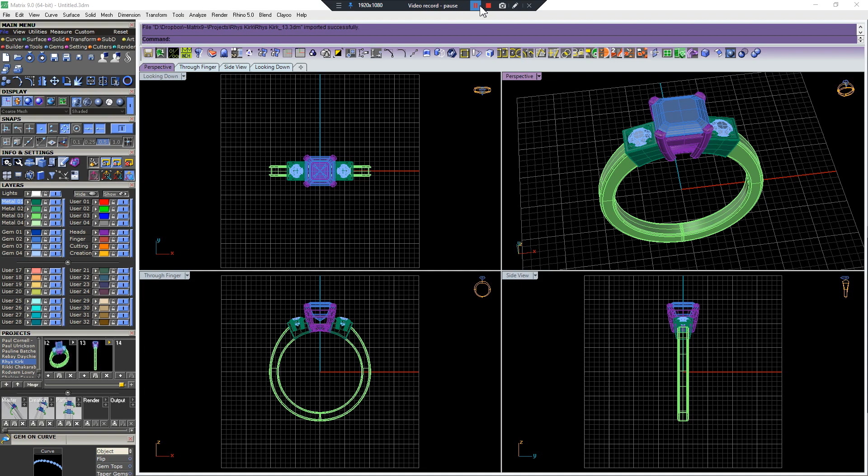Customer approved it. We ended up switching the center to an Asscher cut, which they wanted to take a look at. Totally cool. What I'm going to show you today is how I would prepare this to 3D print.

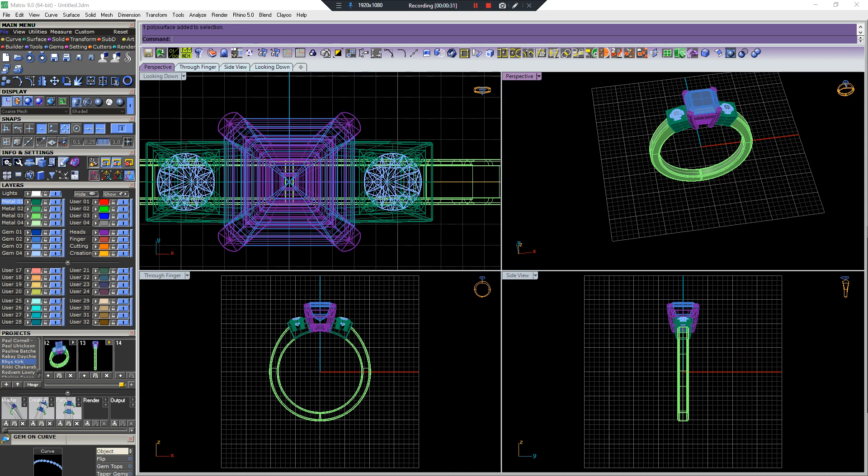I've got a Solidscape printer, so I'm very fortunate. I don't need to sweat the supports as much. Technically, I don't really need any supports, but I am going to put the casting support, the sprue base in, to save me some time.

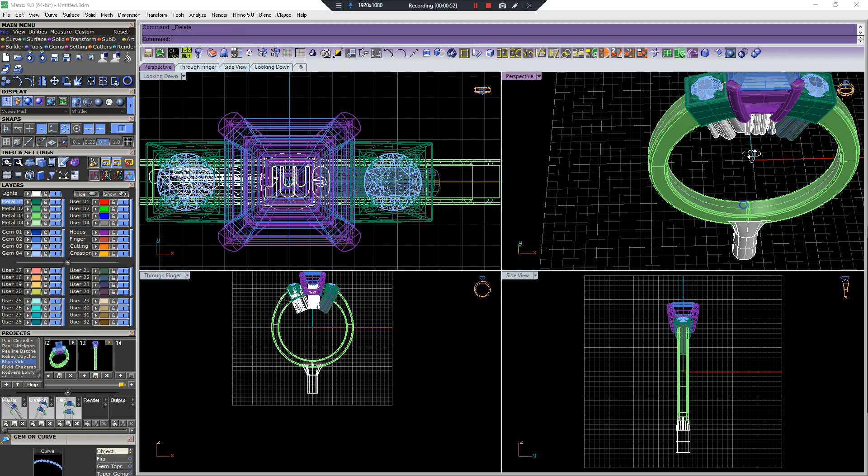First thing, dragged from off screen, I've got a file that has all my stamps kind of pre-made and ready to go. I can come in here and import it, then deselect what I want to use and delete the rest. It's got a nice tapered sprue base here.

And then it's got karats, the karat of gold, and my trade stamp that I use all the time, in this funny kind of elongated thing. Here is how I use this.

First thing I like to do is go into the job bag, get my eyeballs on where I wrote the finger size. Don't trust my original finger size, even though it's probably right. Just don't trust it. Double check yourself at this point in time.

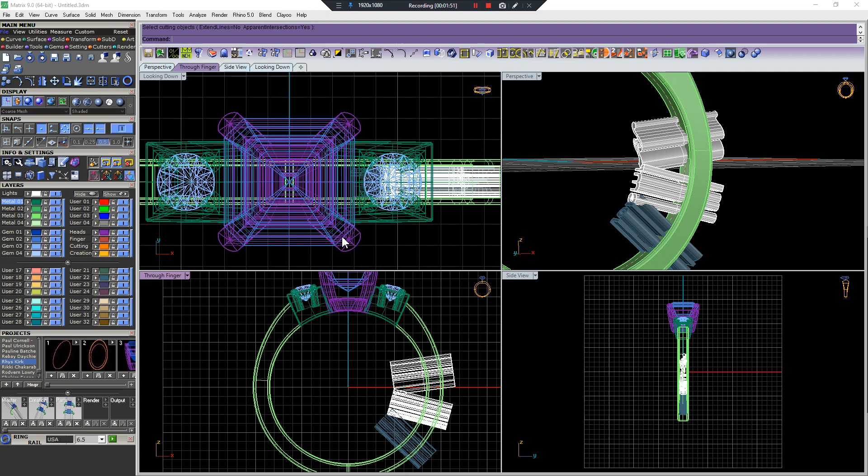This stage where you're prepping it to grow, in my opinion, is kind of the most important part. This is where you really slow down, take your time, double check everything. Because if you make the settings too small, if you screw something up, basically this is going to be your piece. Be friends with your setter.

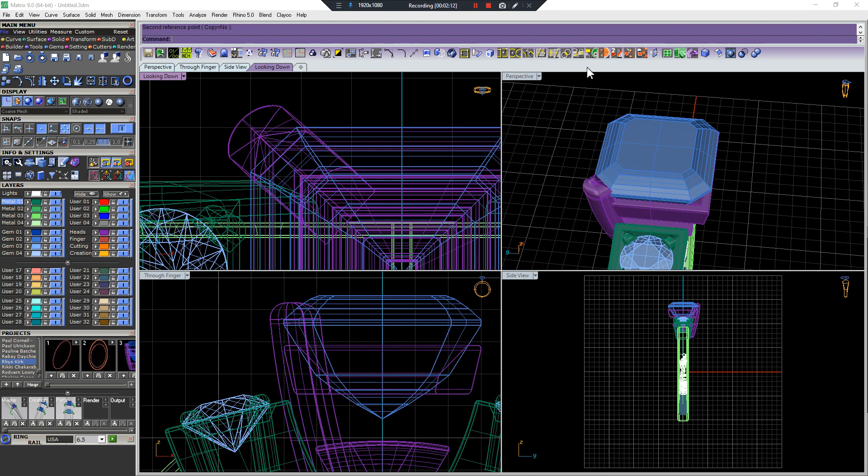You want your stone setter to like you, and don't make their life difficult. Communication with your stone setter is a huge factor if you're going to be successful or not. You're working as a team.

Follow their instructions. So everything I'm doing here is dictated by how far I sink it into the claw, how tall I make the claw over the stone, how I cut the seat, all of that.

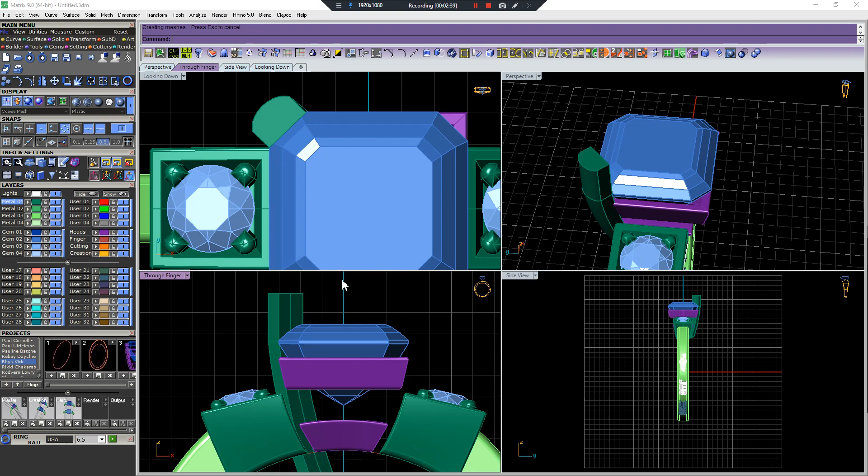That's all been slowly, over time, experimenting, playing around, and getting input from my stone setter, who happens to be my sister-in-law, and she is an incredible stone setter. She's an incredible goldsmith, she's just awesome. We've really tweaked our systems, and what you're seeing here is part of that.

Here's another thing. I know I rendered it to the customer in a certain way, certain proportion. Don't be afraid to make changes.

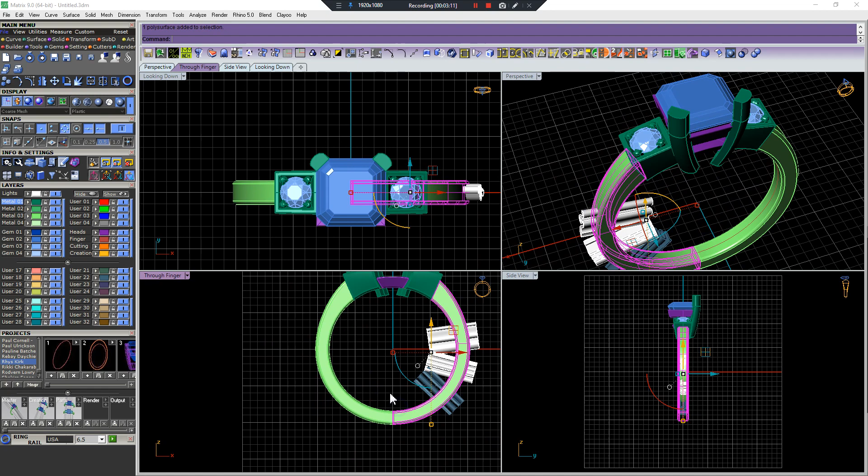When you render something, you're trying to not make it look too big in the computer. You're trying to give a sense of scale, and it's tricky.

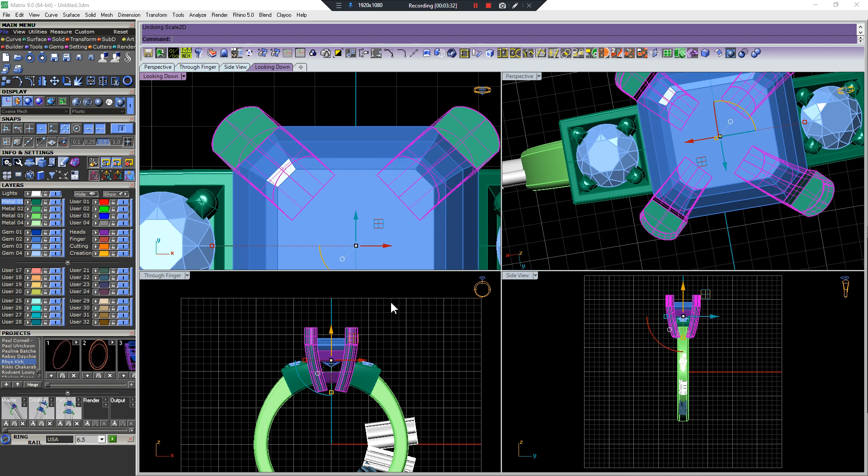When you're prepping something to 3D print, you have to compensate for all the sanding and polishing and all that stuff. So you'll notice here I beefed up the claws. I'm going to scale these up a little bit more.

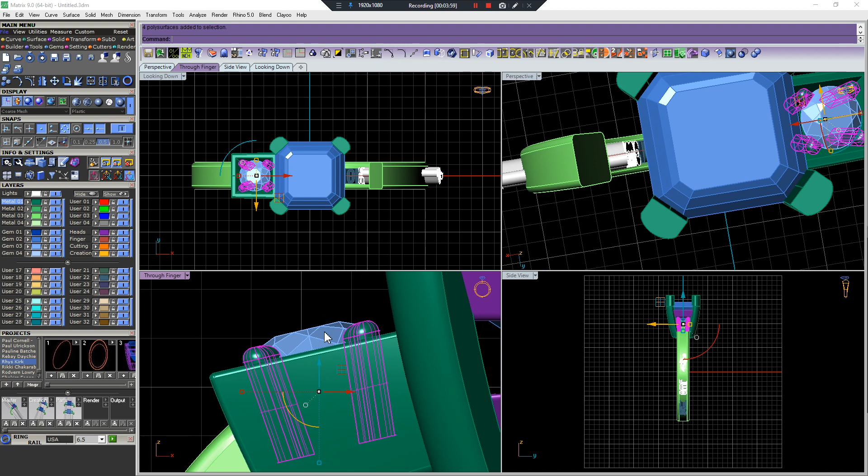And make the shank a little bit wider. Those are just that small amount that I tweaked. That's basically a few swipes of the sandpaper, and that's the difference. So it'll go right back to where the 3D model was in the first place.

I like this shape of claw where it's flat on the inside. It's a little bit easier to cut into. The perfectly round claw maybe looks a little bit better in the renders, I guess, but I use this flat-edged claw a lot.

I don't know what that percentage is. That's about how much I sink the stone into the claw, especially on smaller stones. A little bit more on bigger stones.

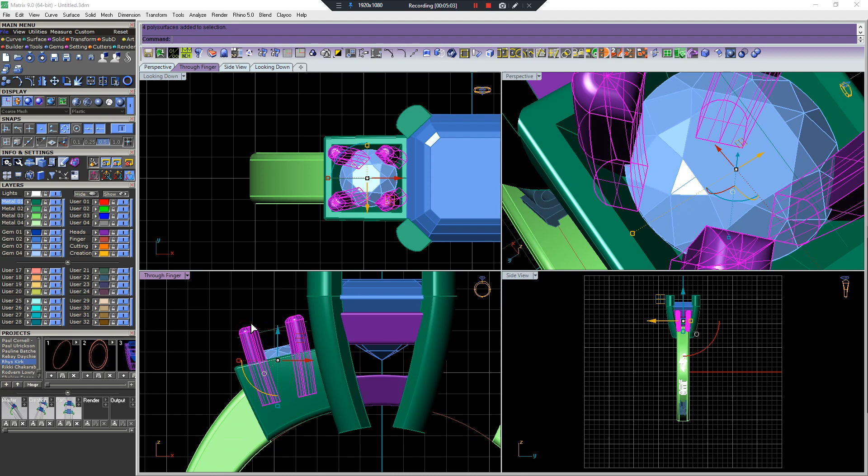You can come in here to your ring dome, take that cap off, or you can just as easily and just as quickly draw a little line. Oops, ungroup. Did I say quickly?

In theory, I'm just showing you a different way. Split, cap, and then that way when you go to build another claw, that slider will be where you want it.

Here's another factor when you're prepping stuff to 3D print. It's hard to get into the nooks and crannies of a ring, so don't be shy to cast in multiple pieces. For a finisher sanding and polishing the mount, it's almost always easier to finish the pieces separately, and soldering them together is really easy, and you can get a better finished product that way.

So I'm going to do this head separately. Also, as of right now, this head, this bottom thing is tapered.

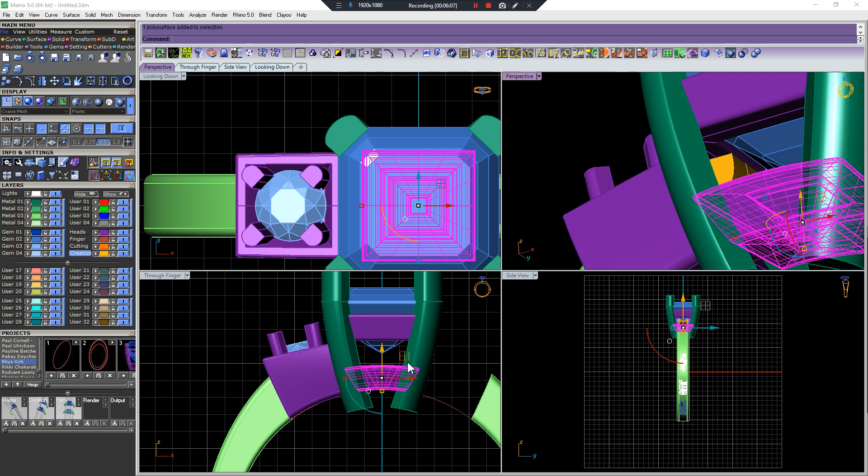I'm just going to scale it, and I'm going to bring it down a little bit. I'm going to bring this down a little bit. So let me just hide these claws.

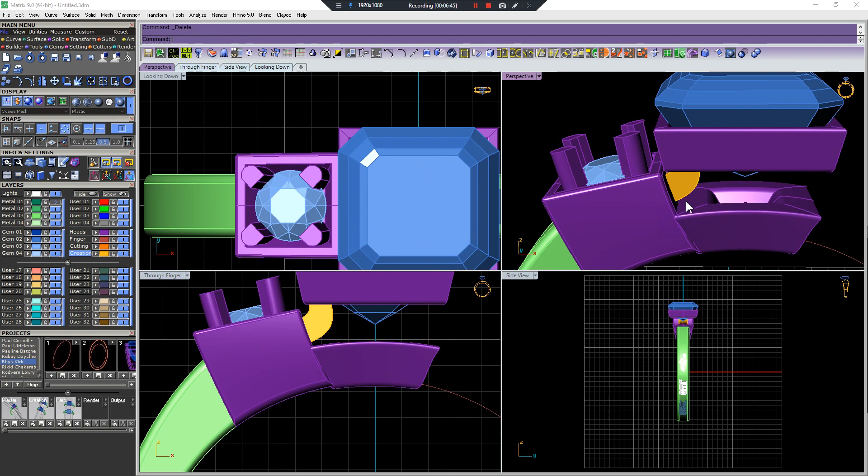Okay, so we got a nice solid connection between here. Now this looks a little goofy, not perfect, not beautiful. That's okay, it will work out a little bit later.

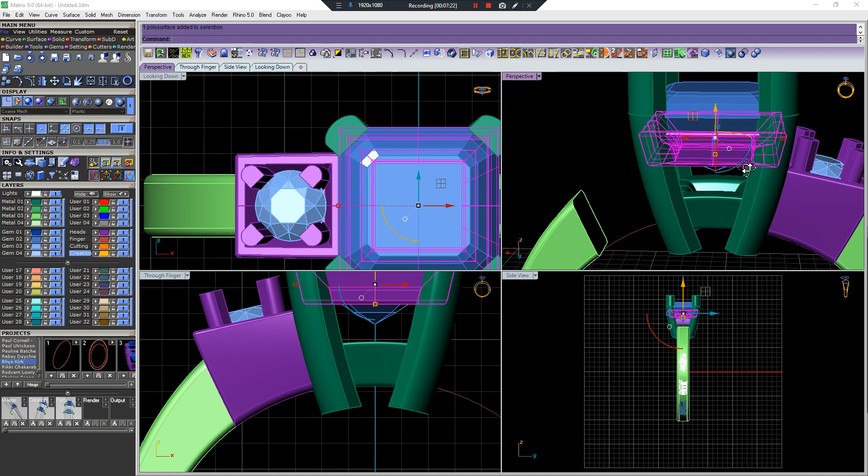So now that I know I got at least one nice solid rail, right here is where it's going to get welded, kind of against this claw and against this. I know that'll be plenty of surface area, so I don't need to worry about the junction between this top rail and this. If this was really thin and I didn't love how much surface area there was connecting those two, then I would add a little support like I had in yellow before. So this is better. I'm confident that when I weld this to this and do the head separately, it'll be enough.

Don't have this too tight. I can guarantee you this is going to be a moissanite. I can guarantee you that the real moissanite is way fatter and way bigger and crappier of a belly than this perfectly cut gemstone in here. So when we do the gem cutter, we're going to hog out that rail quite a bit.

Let's raise this stone up a little bit. Okay, how's everything looking? Let's widen that out a little bit.

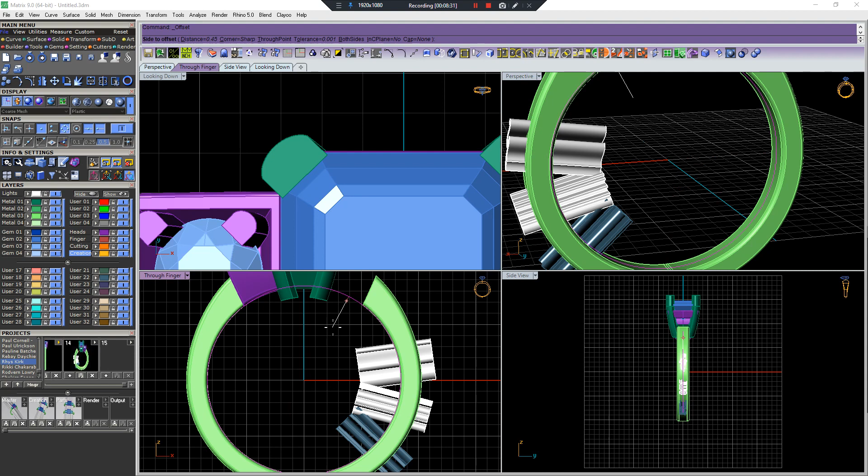Let's do the stamps very quickly. So what I do here, the reason why these are extended out, on a bigger ring I can scale them up and down, and I leave them extra long so it's easy to scale. I know that no matter how big or small, if it's a size 3 or a size 10, they'll kind of be in the ballpark and I can scale them.

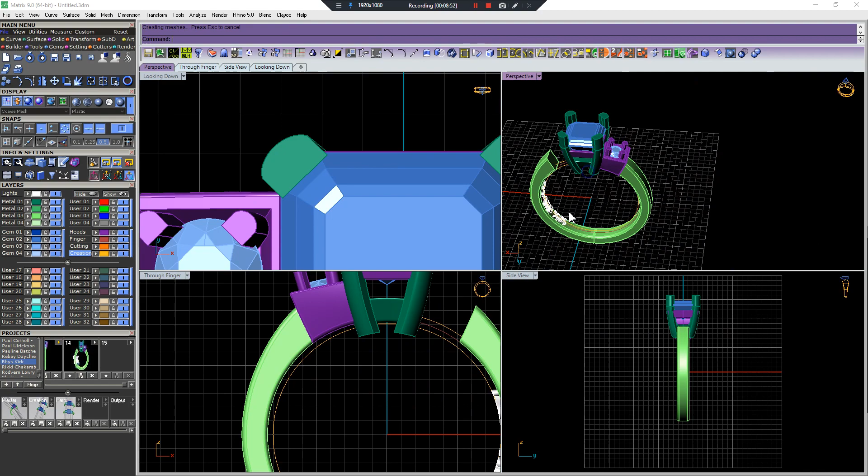I like to sink my stamps in about 0.4 to 0.45. I'm going to 3D print these stamps into the model. So I just take the ring rail, offset it by 0.4, extrude it, and then Boolean intersection, and then I've got my stamps there.

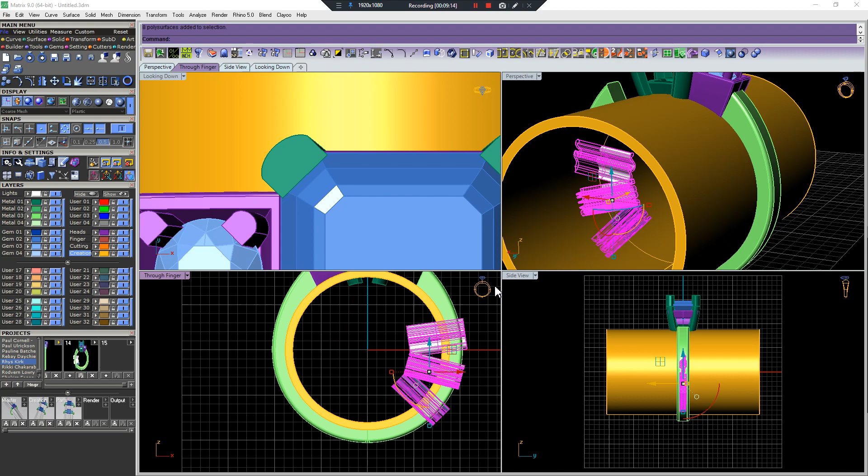And those are looking just a hair too close to that fillet. I'm going to make them a little bit smaller. There we go, I want a little bit more room there. Like them fairly up high. Don't be putting them where you might size them down the road.

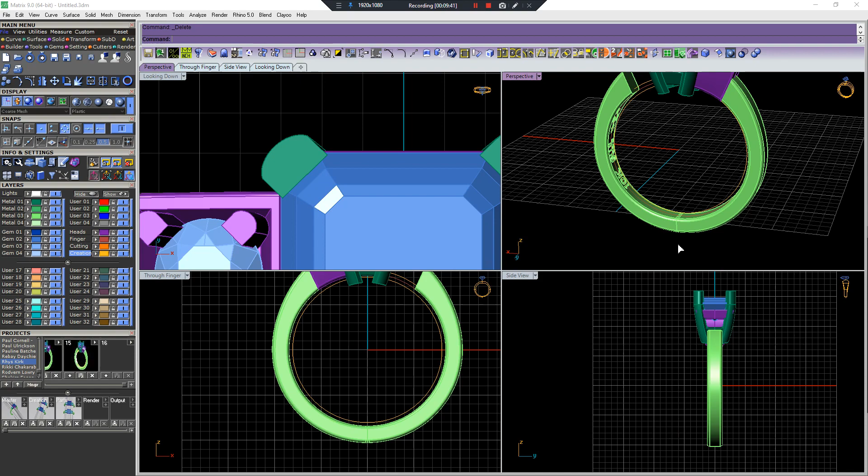Boolean difference. Actually, I'm going to save all the time. And Boolean difference. Okay, for whatever reason, my bottom piece disappeared. Okay, we'll bring it back.

Okay, let's Boolean union that head together. That's already Boolean union together.

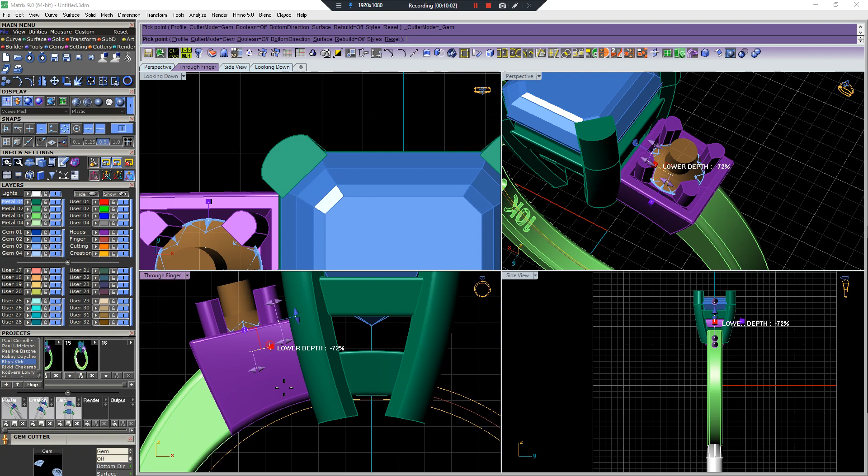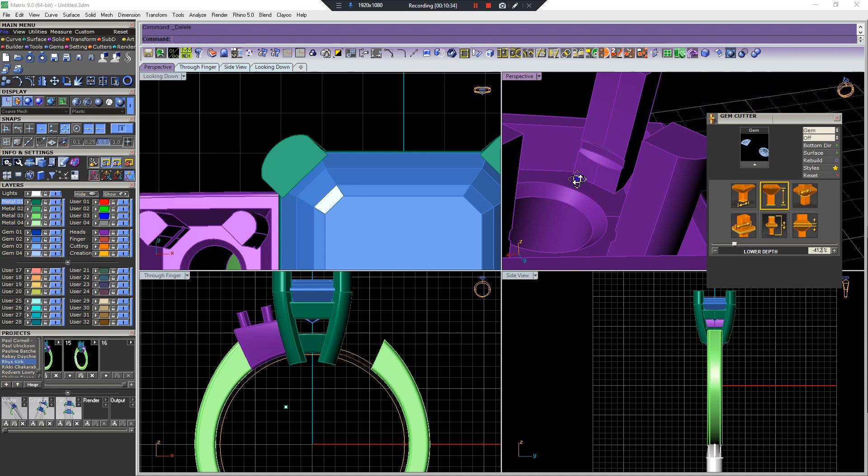Let's come here to gem cutter and let's get something with a nice sharp edge and a fairly big pilot hole. If so, this little guy's at an angle. If you want to tweak that angle a little bit so it's a little bit more centered, that won't affect the flatness of the seat. That's only the pilot hole. So that looks good. And what we want is a very small notch for the setter to be able to see it and cut her own seat from there. So that's looking good.

And we'll do the same thing here. Now, here's where I'll taper this head a little bit. I'm going to look at the underside. I want this rail fairly thick.

Let's Boolean on surface. Let's select this. Let's hide this stone so we can see what it's doing here. Let's take this lower seat and try to remove a little bit more material. Bring this. So I don't want the lower rail too thin, but I want to clean up some material there. But it's more the upper rail that I want to be...

Okay, I've got this funny little notch here. Oh, you know what, I know what I did. I accidentally left the rail from the Princess Cut and didn't modify it. Ooh, okay, let's Boolean difference. Is that going to be a big deal? Probably not. Probably not, I'm going to leave it. It's fine, it's fine.

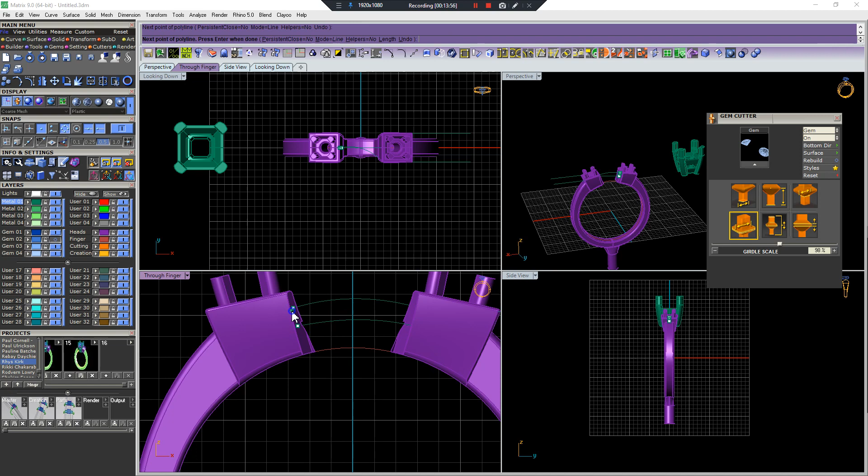I'm going to make sure to put a little support in here so that the stones can be set. It can be put on a ring holder, and it stays. That's a mess. Let's do this a different way.

Curve Boolean is our friend. There we go, lots of ways to do that - pipe, whatever. I just wanted it to look just like this, so that's why I did it this way. This is so the stone setter can put this on a ring holder, ideally at the bottom, though it can be up top. It won't really hurt anything either way, and it's really easy to remove.

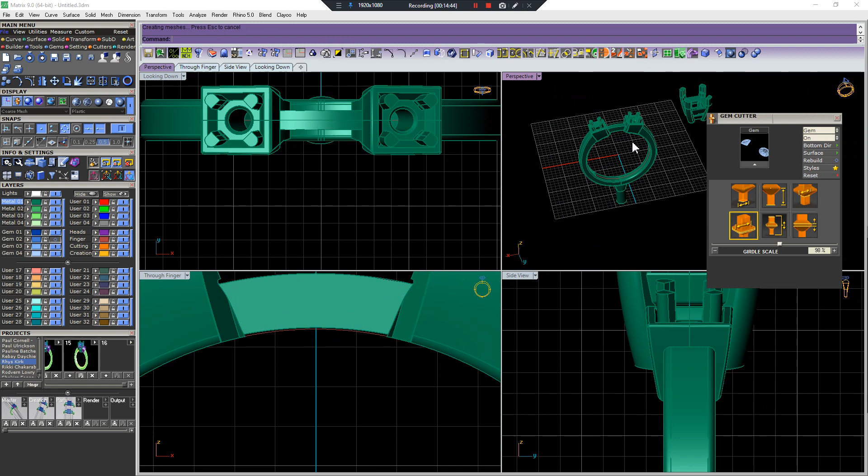Now this is so thin, I don't need to build any casting supports like this. This is going to cast just fine. I'm going to lay it on its side just because it saves me a couple steps - that's the orientation the 3D printer likes it. Okay, I just threw that in my ready to print file.

And what I'm going to do here, these are my casting supports. I like to build them right in because it saves time.

Oh, you know what? I changed my mind, I changed my mind. I'm not happy with that. Okay, luckily...

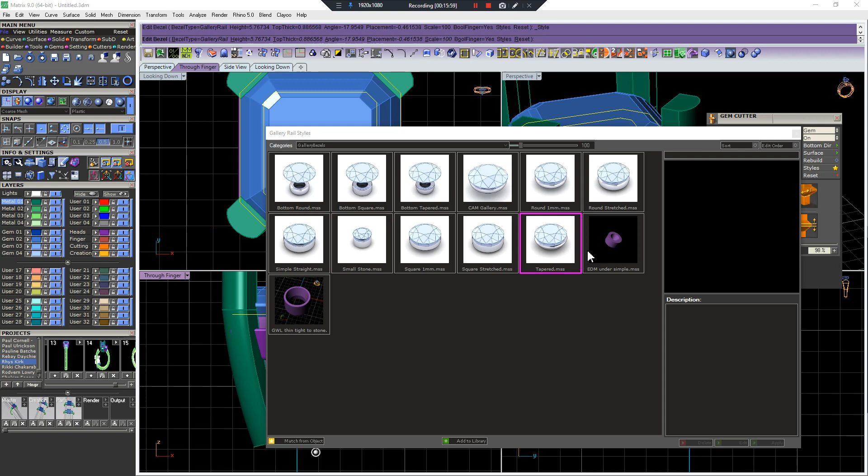Okay, so this is my pre-booleaned version. I'm going to bring my stone back. Do I have two? Yes, I do. Okay, I'm going to do an under bezel. Do I have any saved styles for this one? Okay, I'm going to delete this, let's go back to this edit bezel. Get out of here. Okay, there we go.

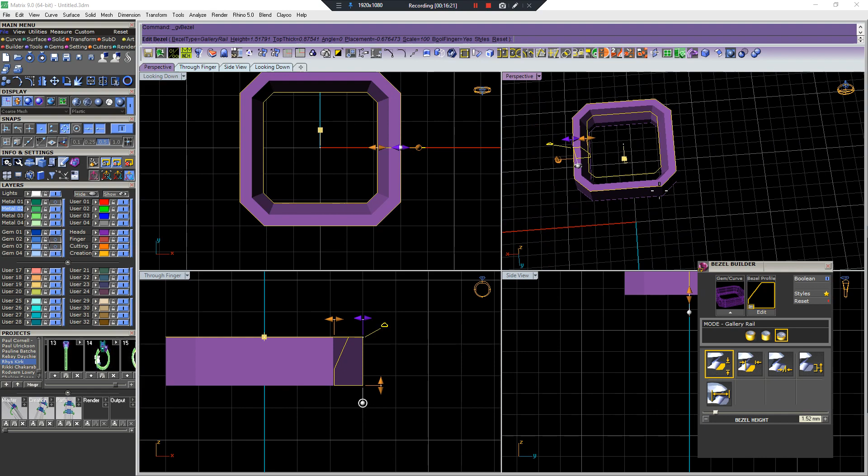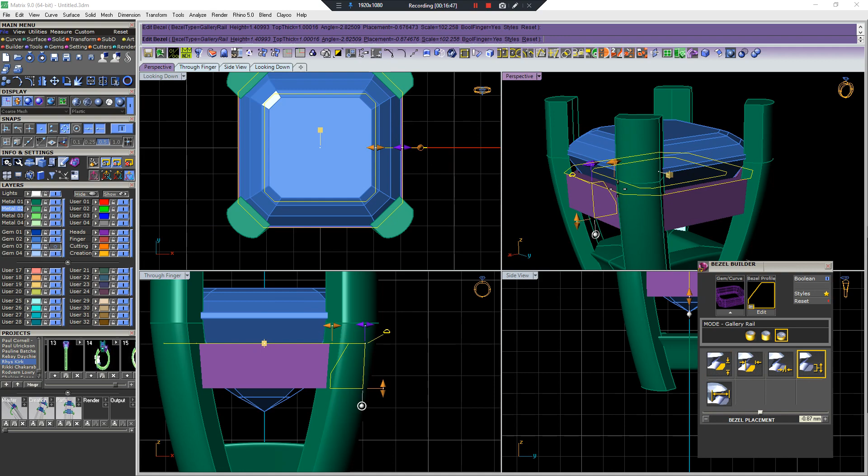I do admit that I build things a little fast sometimes, and in some situations if I took my time to start, I wouldn't have to go back and redo stuff. But at the same time, I have to redo so many things and make so many revisions and changes that... yeah, if you have a time machine, then obviously you know exactly what you want right from the get-go.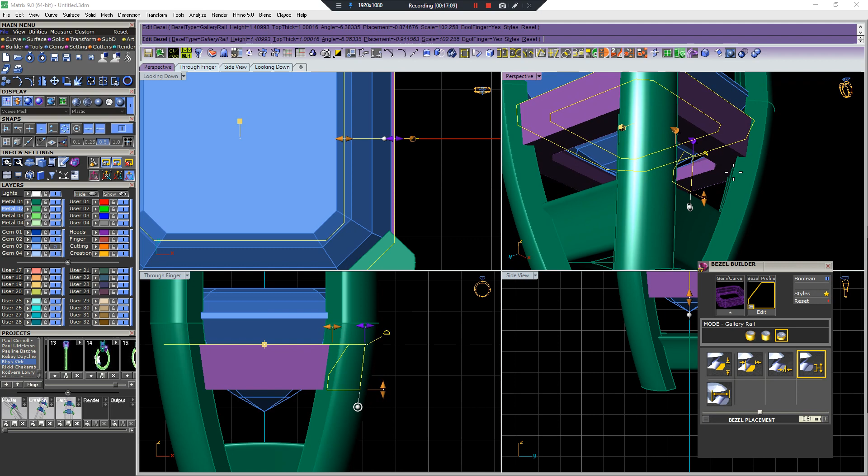It's like a real tutorial where you watch it, and every step is a step in the right direction because they know the end goal, and maybe they've prepped it or practiced it, or maybe the end goal isn't anything specific - as long as they just follow the basic rules, then they're fine.

So in my case, we are doing it all on the fly, all on the go, and I just want you to see what that looks like, because just watching somebody work like that and do their regular workflow is what I'm curious about. So I'm sharing it with you.

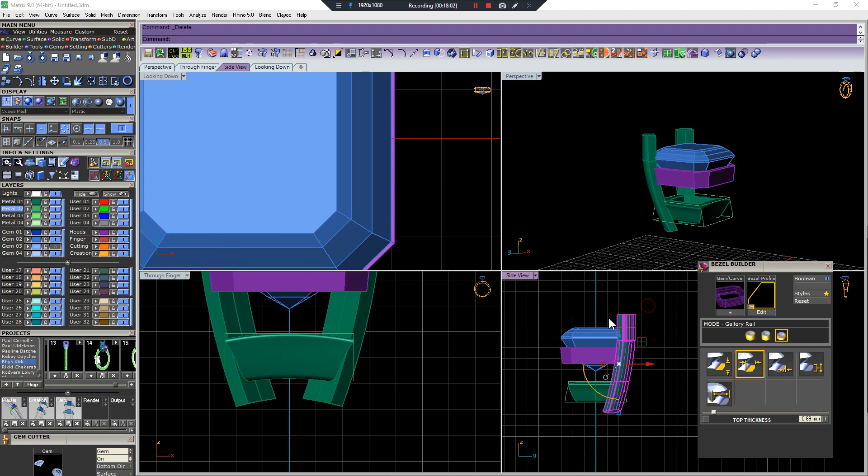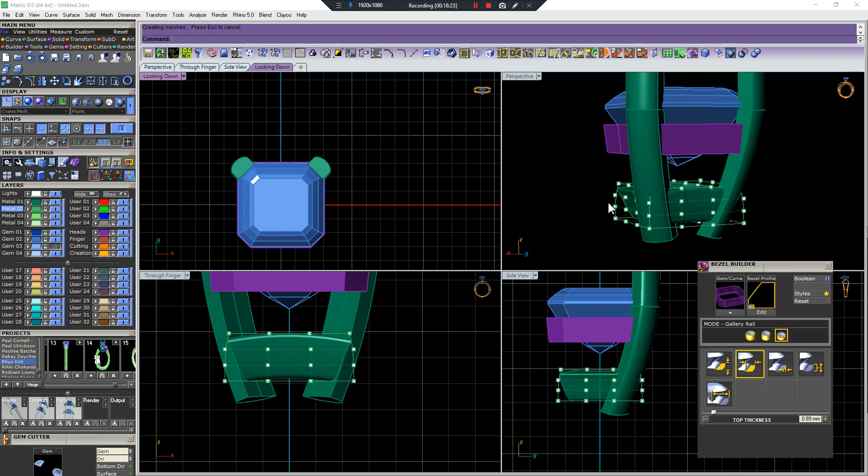You will also notice that a lot of tutorials and a lot of people, they build all in the perspective viewport. I like to have all four because I'm always grabbing stuff - it allows me to grab things easier, having all four viewports available.

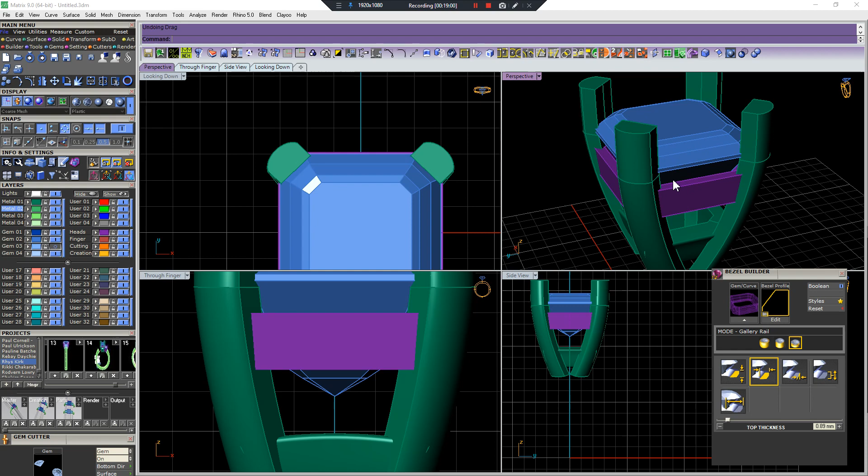Okay, so there's lots - I want as much room as I can for the belly of that stone, so that's looking much better. I also don't want this, looking at it from the top, to overhang - I don't want to see this. So it's sort of a balancing act of making sure there's enough room so that your goldsmith and setter doesn't have to grind the heck out of it, but also making it look good and as thick as possible so it's strong. It's definitely a balancing act.

So now that the under bezel, or sorry, the entire setting is good, I'm not going to use this cutter. I'm going to use this guy here.

And I just want a small divot so that the setter knows - it helps keep the stone level.

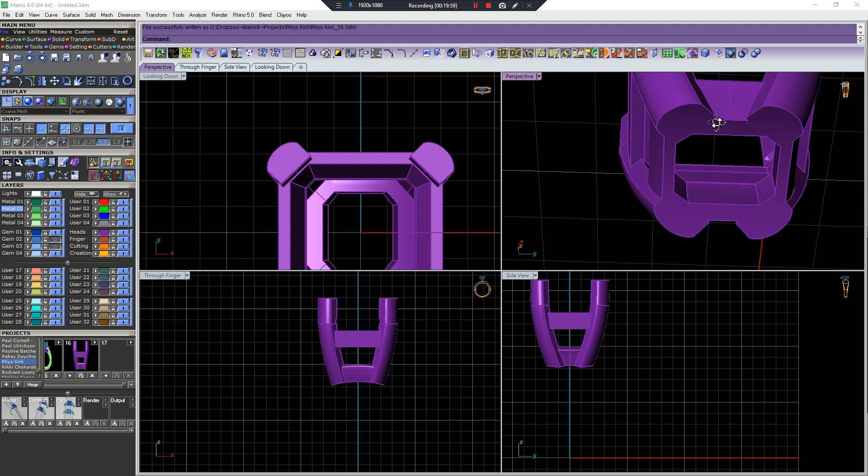So now, oh, I didn't want it that thin. Actually, no, that's okay, I'm gonna just screw it this way. This side's gonna get the side welded to it, so that is totally fine.

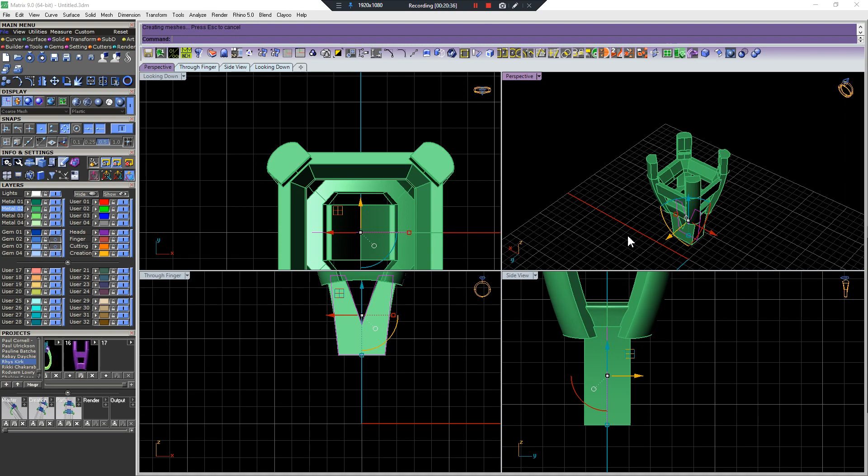Curve Boolean. Okay, I'm happy with that. Boolean union, lay on its side, and send. That's it.

Not the smoothest job I've ever done, but that's okay - we're just here for fun, just watching, just doing stuff on the fly. So thanks for watching. If you're here, say hey. Thanks, man. Bye.